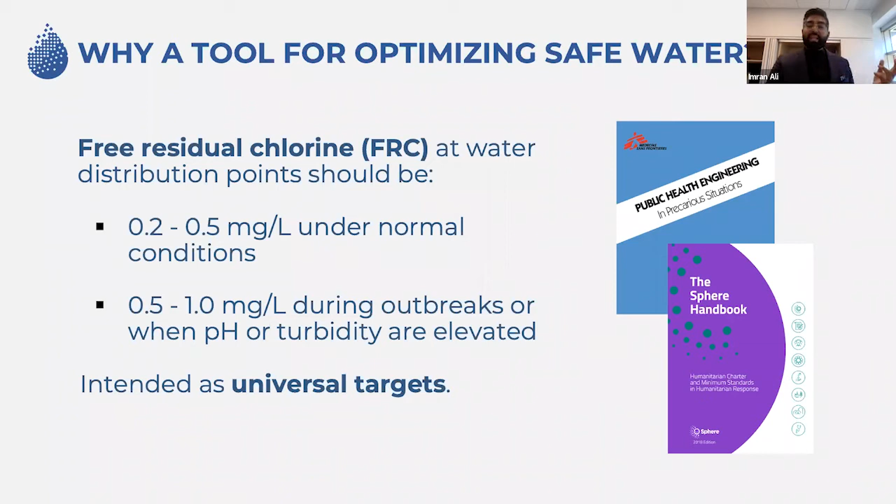Now, what's important is that these are intended as universal targets that are applicable in any emergency setting around the world. Now, typically in a camp setting, we rely on centralized water treatment using chlorination, right? And our usual practice is to monitor FRC levels after about 30 minutes or 60 minutes of contact time, and then to follow up with monitoring at the tap stand. This is the critical point where we're meant to deliver those universal FRC targets at the tap stands.

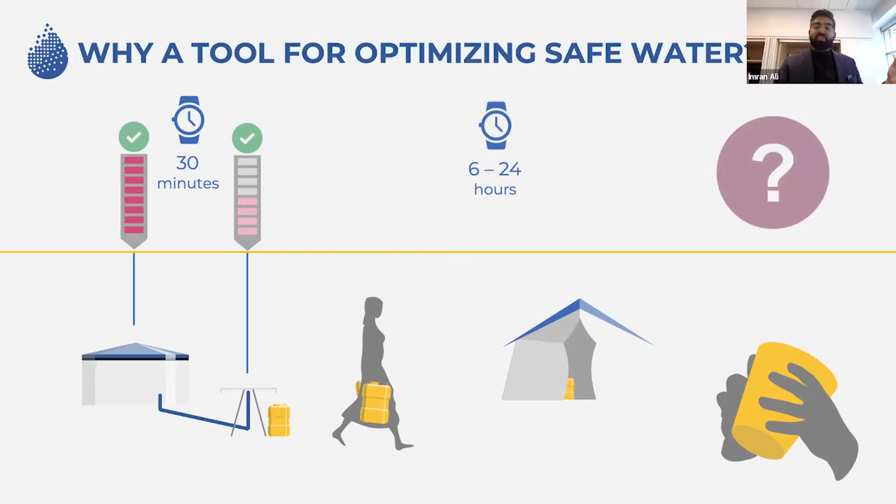But what happens after that water is collected, transported home, and then stored and used over many hours? Even if that water is originally safe at the collection point, we often don't know whether that residual protection is sufficient to persist through that last mile of the safe water chain before drinking. That could be 6 to 24 hours later, depending on the situation in the particular setting we're working in.

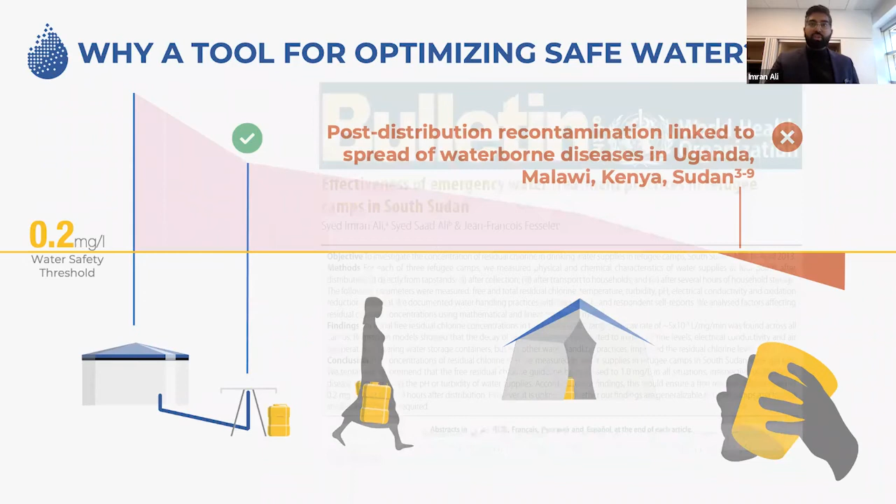Now, we encountered this problem firsthand during a major hepatitis E outbreak in refugee camps in South Sudan. There, we observed that even if water meets the humanitarian FRC standards at the distribution point, that FRC protection only persists for a short period of time, and then pretty quickly thereafter falls below that protective threshold, leaving the water vulnerable to being recontaminated by waterborne pathogens. And there are, in fact, many reports about water being recontaminated after distribution, leading to the spread of waterborne illnesses amongst displaced populations. We described this problem in a paper in the Bulletin of the World Health Organization, based on experience in South Sudan.

Now, what we saw in South Sudan and in other sites that we worked was that chlorine decay after distribution is really significant and is really rapid. So what we need to be able to do is model that chlorine decay so we know how much to add at the beginning to ensure the right amount persists through that last mile and arrives at the point of consumption. Now, unlike the initial chlorine demand of raw water or the decay that occurs during distribution in tanks and pipes before the tap, what happens after the tap, that post-distribution period, is really challenging to model.

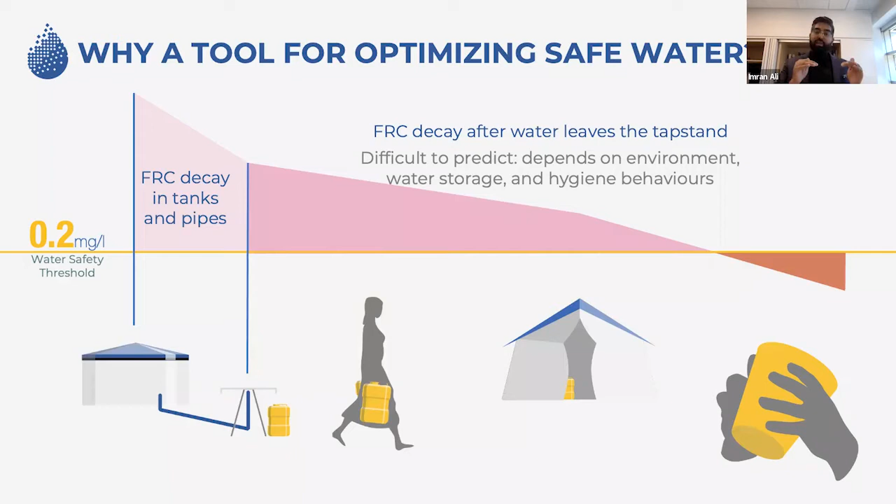It depends on factors that are related to the environment, to the raw water quality, users' behaviors, that are very site specific, they're very variable, and they're not really well understood in terms of what kind of impact it has on the water quality. And the modeling is important because it's not just a matter of adding more chlorine. A chlorine dose that is too small results in the risk of recontamination, but too much chlorine can lead to acceptance issues around taste and odor rejection. So we have to get the modeling right so we know how much we need to deliver to protect public health, but not have so much as to drive rejection.

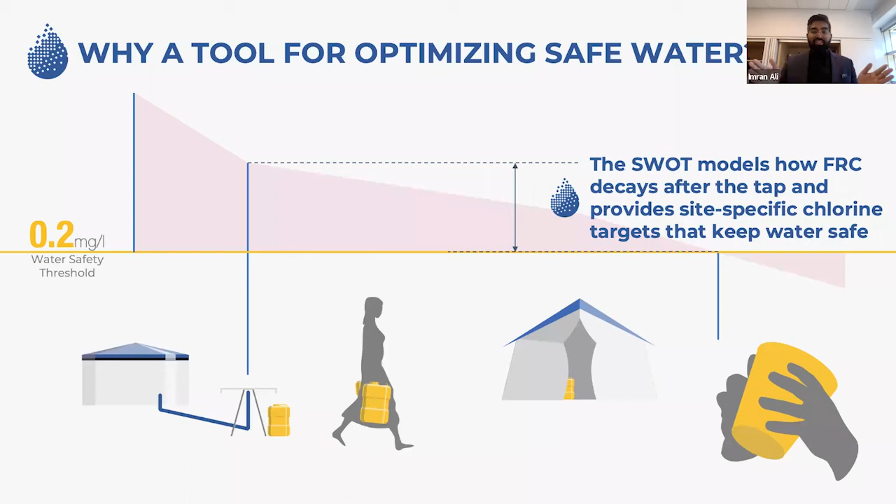That's where the SWOT comes in. The SWOT uses the water quality monitoring data that we already collect in the sector to model how FRC decays after distribution, and then uses these models to provide site-specific and evidence-based water chlorination targets that keep water safe all through that last mile of the safe water chain to where it's actually consumed. So for example, the SWOT may suggest in a particular water system that the target FRC at tap stands needs to be at least 0.9 milligrams per liter in order to maintain that protection for up to 15 hours.

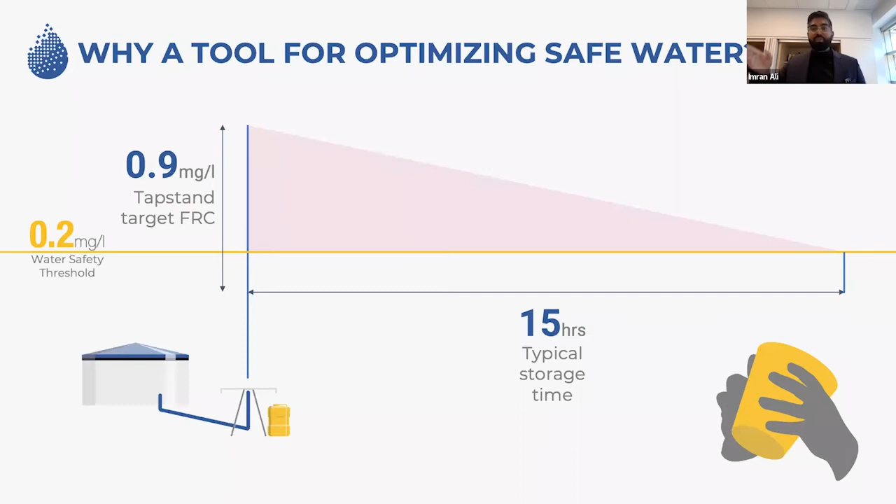Since there's so many different things that can happen to water after it leaves a tap stand, there's a wide range of chlorine decay rates in actuality. The modeling tools that the SWOT deploys are probabilistic and provide a forecast of household water safety, given the natural range of conditions that are encountered in the real-world field setting. The SWOT provides a summary of the current household water safety at the site with current practices and the predicted improvement in household water safety if the SWOT target recommendation is implemented at tap stands. Now, this information is critical for deciding what action is needed to improve water safety at the sites that humanitarian responders manage.

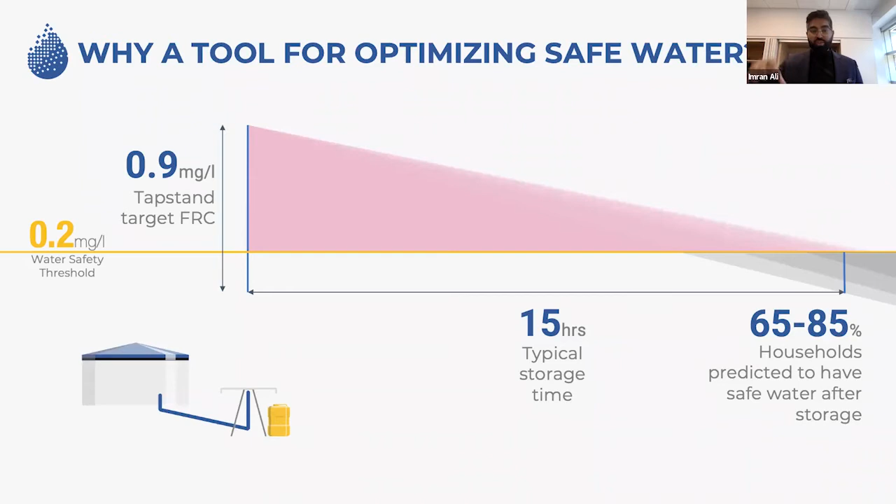This could mean increasing FRC at the tap stand, but it could also mean slowing down chlorine decay in the setting by, for instance, rolling out a jerry can cleaning campaign or through better water storage. Based on those site-specific conditions, we can help you identify what are the most appropriate strategies for improving water safety. And as the situation changes, the SWOT modeling takes this into account and adapts, reflecting the current situation and generating a time-specific and suitable recommendation for the current prevailing conditions.

Let me give you a quick overview of how it works. So the SWOT takes the water quality monitoring data from tap stands and households that are already being collected in many sites around the world. Field workers can take that data and upload their monitoring data to the cloud, to the SWOT, where it's processed using our numerical modeling and machine learning engines.

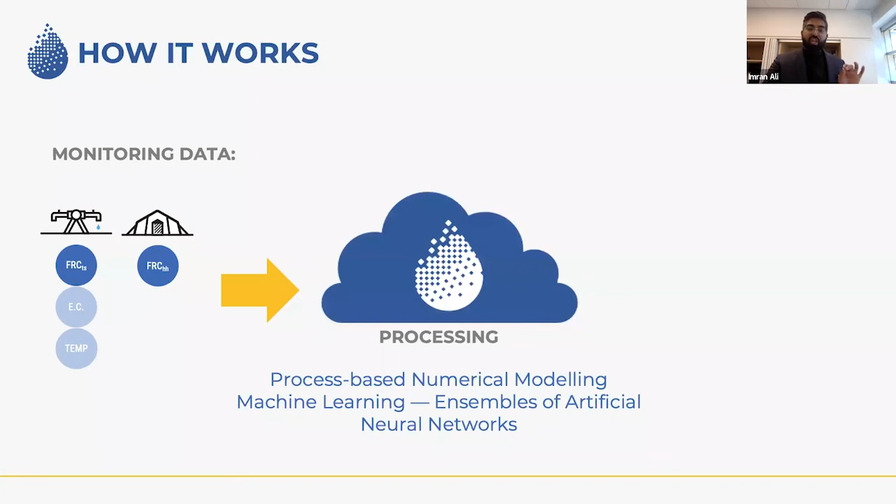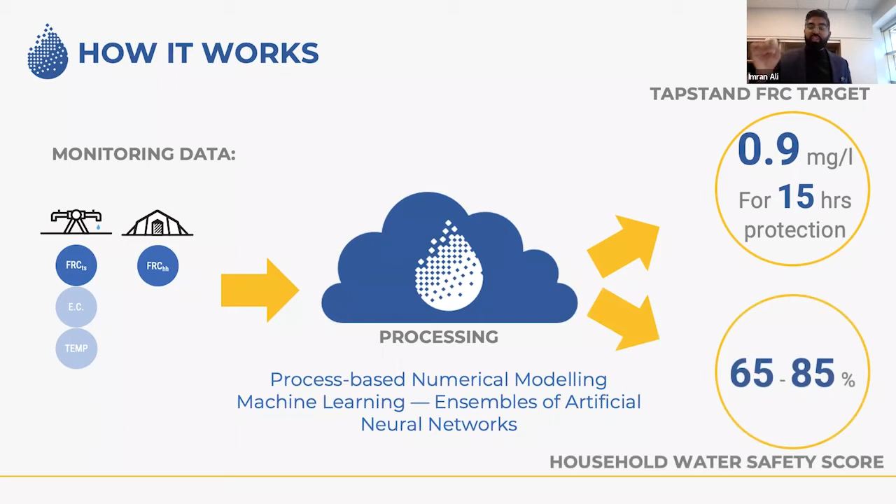These generate a site-specific and evidence-based FRC target that ensures water safety for a user-specified duration of household storage time. So in some settings, that might be 15 hours, in other settings, that might be 24 hours, in other settings, it might be 12. Depending on the local conditions, we can specify a chlorination target to protect it for that duration. It also specifies what is the household water safety that we can expect if we implement the target compared to the status quo practice.

Now, how does it work? There are two modeling engines under the hood. The first is based on chemical engineering first principles using process-based numerical modeling techniques. These are an adaptation of the chlorine decay modeling systems that are used in the closed system of distribution pipe networks and adapts it to the open system of the post-distribution setting. The second approach we take in the SWOT is based on machine learning using ensembles of ANNs.

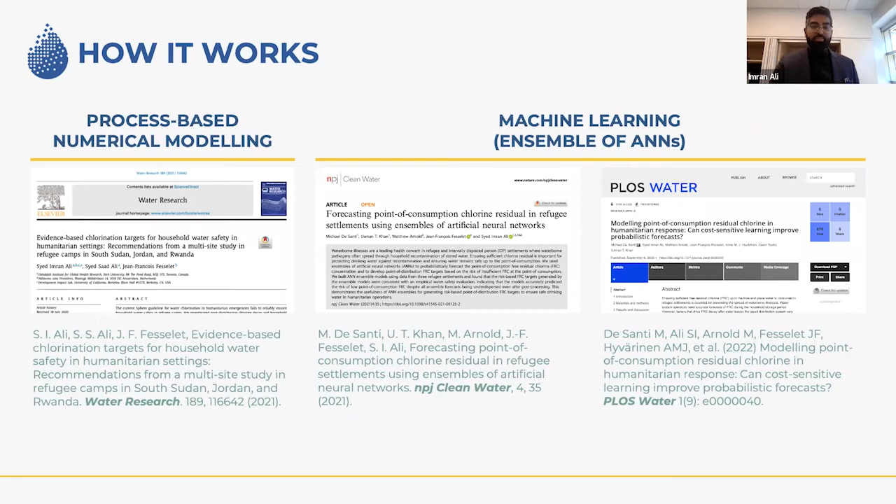And both of these have unique advantages that provide us with the robust recommendation that we combine in the SWOT's analytics. And you'll hear more from our modeling team later on about where we've come in these modeling engines and what's next for us. Our team has led the first engineering research on the phenomenon of post-distribution chlorine decay and published a number of papers in leading peer-reviewed journals describing our modeling methods, and they're completely open source and available for anyone to implement in their settings.

Now, from a field user perspective, here's how data collection works. The SWOT works on the principle of paired water quality sampling. Each paired sample consists of a time measurement of FRC at the tap stand with a follow-up at the household from the same water 6 to 24 hours later. So what you do is first you test the water quality at your tap stand as you normally would. Mainly, we're concerned with FRC, but we can also use electrical conductivity and water temperature data to help improve the accuracy of the modeling results.

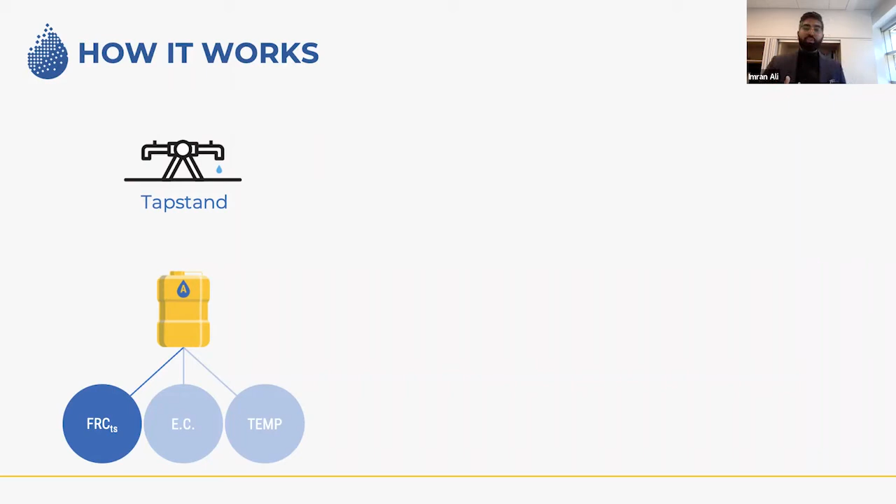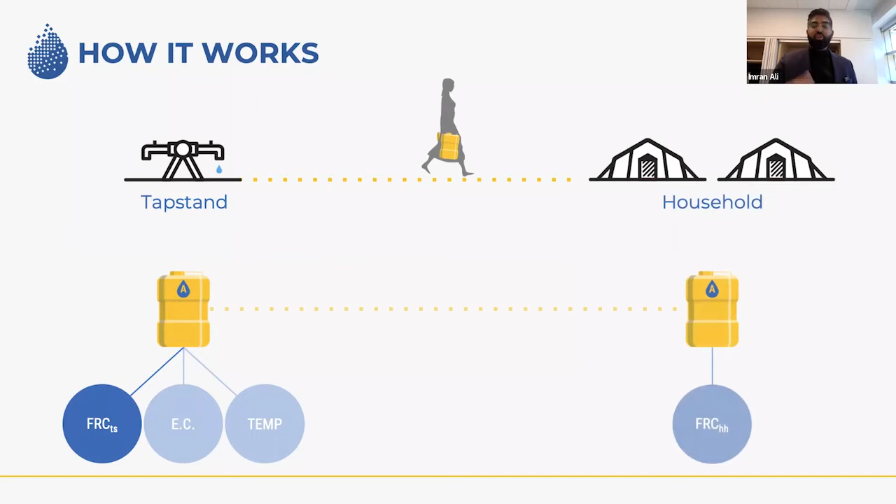We then accompany the water collector back to their home and mark the container. And then we return to test the water quality again after the normal duration of household storage and use. So we only have to look at the FRC at the household, and that time can be 6 to 24 hours later. Now, the SWOT requires about 150 of these paired samples in order to provide an accurate recommendation.

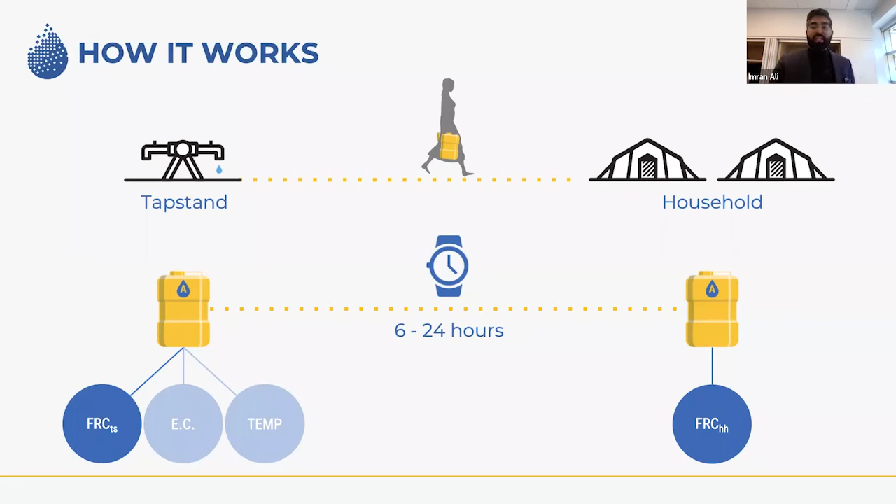And users typically collect those 150 paired samples either as part of their routine monitoring, because they're already testing at the tap stand, already testing at the household. So we just combine the two together, or as part of a specific assessment, like a big KAP survey where we're doing a lot of household monitoring. So either one of those two modalities can work and integrate with the SWOT. This is the same data that is used for monitoring and quality assurance and reporting. So we use the data that's already being collected widely in the sector for building these site-specific and evidence-based chlorination targets.

Now, let me walk you through quickly some of the work we've done on building and testing the tool. The SWOT is built on years of water safety research in refugee camps, including foundational research we carried out in South Sudan, Jordan, and Rwanda. We've carried out field implementations and deployments of the version 1 prototype in Bangladesh, Uganda, Somaliland, Syria, Nigeria, and Tanzania. And we've been working with seven implementing partners across these contexts.

In 2019, we carried out a major proof of concept study of the prototype SWOT to see if the chlorination target generated by the SWOT could improve household water safety outcomes compared to the status quo humanitarian FRC standards. We carried out this proof of concept study at the Kutupalong-Balukhali camp in Cox's Bazar, Bangladesh, in collaboration with MSF and BRAC.

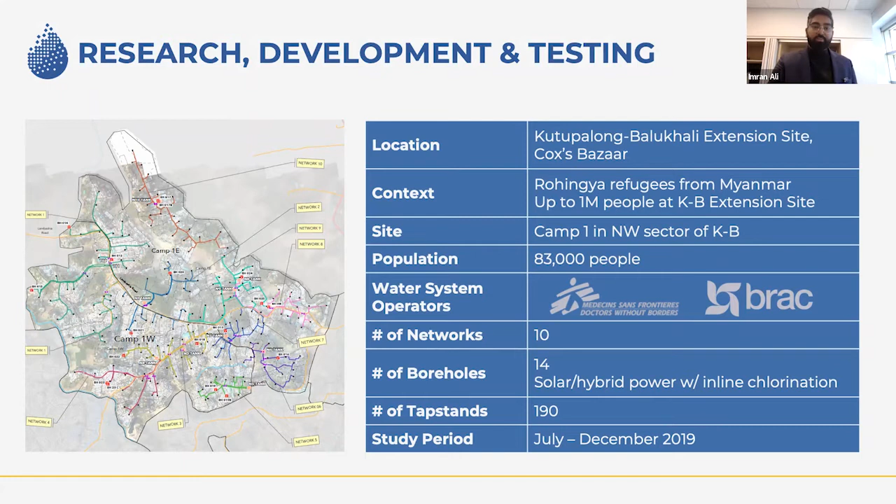Now, what we saw at the Kutupalong-Balukhali site was that with the status quo practice, meaning using the Sphere chlorination targets, at 12 to 18 hours later, which is the typical duration that people were storing and using water at this site, about 42% of them had sufficient residual to protect that water at the point of consumption. However, when the SWOT target was implemented at tap stands, it doubled the proportion of households that had safe water at 12 to 18 hours. So a massive improvement in the effective household water safety by implementing the SWOT.

Now, through the proof of concept study, plus the remote pilots we undertook in Nigeria and Tanzania, and all the other field deployments, we've been listening to the users of the SWOT on the feedback they have for us and learning from our experience in the field. What we've learned is how we need to adapt the SWOT to make it more effective and suit our users better to help them deliver safe water in emergency settings. We got a couple of key points of feedback that we wanted to build on.

One of them was improving our UX, UI, our user experience and user interface, to make it more user-friendly and intuitive. We also got feedback that users wanted a results and data visualization dashboard on a web platform, which we didn't have in version 1. Users also wanted continuous site records and functionality to manage a portfolio of multiple water supply project sites, basically creating an online workspace for water quality. We needed more robust modeling, as well as integration with mobile data collection tools like Kobo.

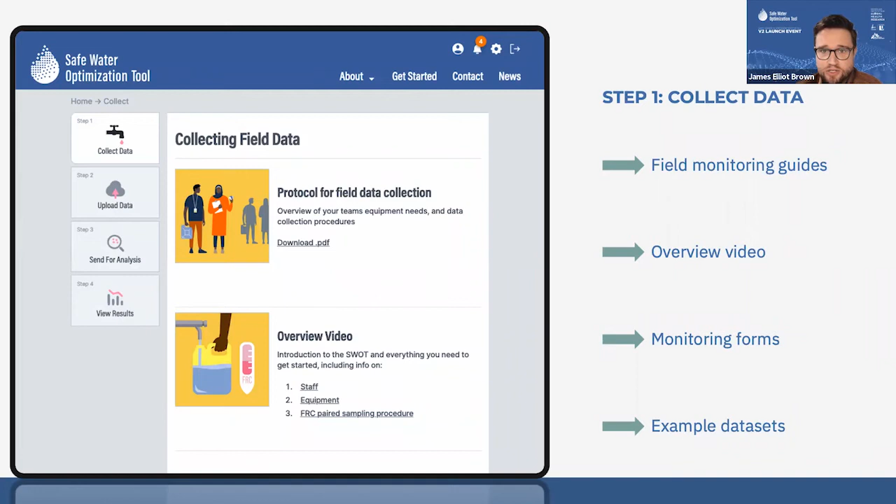So we'll start off with the first step. This is data collection. So in this page of the website, we've got some field monitoring guides. We've got links to an overview video, some sample monitoring forms, and example data sets you can use to get used to the kind of data collection and data management tasks that are going to be needed for using the tool. At the same time, obviously, we have a lot more information behind the scenes, and we would be very happy to help you access it and help you set up monitoring systems for your particular context.

Next slide. In terms of uploading data, as Imran suggested, we've based this iteration, this version 2, around being able to add additional data and build up a big data set for a particular field site. So you'll see here at the top, the first task, when you're uploading your data, is to assign that data to a particular field site. And that field site will exist within a country and an area that we will set up for you as part of the onboarding process.

The next step is to drag and drop your file into the interface. And so the SWOT accepts either a comma separated values or an XLS Excel sheet. And we can provide templates to help you get set up and help you understand the formatting of those files. It's relatively straightforward. Drag and drop that onto the interface, and then you click upload, and that sends that data into the interface, and we clean that data in the back end, and we create a data set that can then be analyzed. So that's the next step.

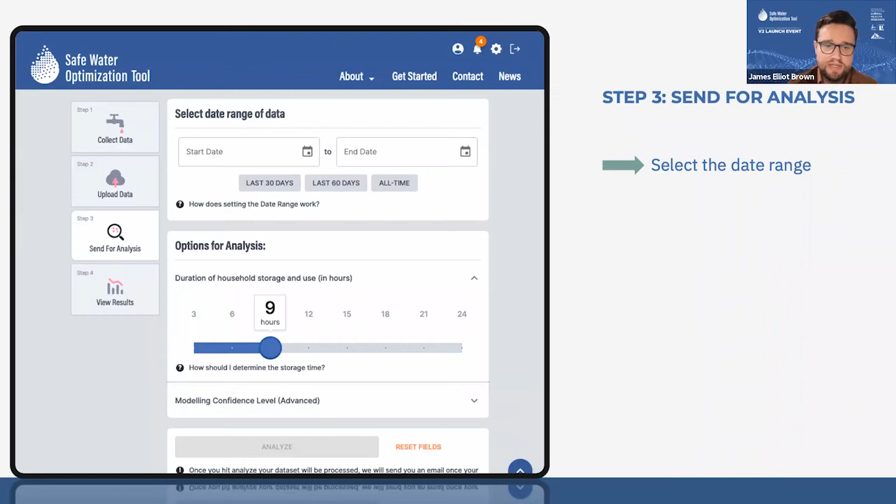So this is a send for analysis interface. The first thing you have to do after you've selected the field site that you're going to be analyzing is to select the date range. So now in this version 2, where you potentially have several months or even years worth of data collection all being stored at the same site, this date range allows you to pick a particular period of time, and the SWOT is going to select samples from the data set that meet that time period. So you could potentially use that to analyze what would happen in the summer versus the winter, the dry season versus the wet season. Or of course, you can analyze the entire data set and get the richness of the data throughout the year.

The second step is then to set the storage duration. So this is the amount of time that people in your field site are typically storing water. So whether they're collecting water in the morning and storing that throughout the day, or if they're collecting it in the morning and again in the evening, and that storage time period is much shorter. This is what the analysis uses basically to create the FRC target.

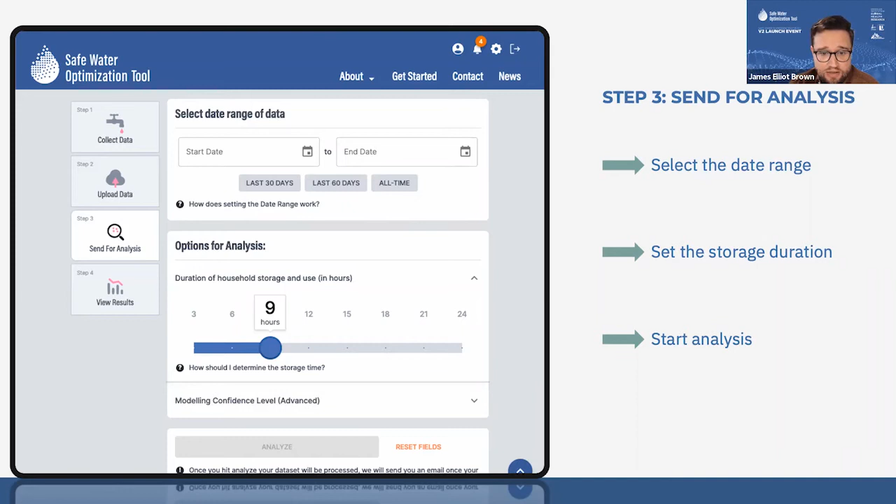And then once you've set the options for analysis, you can start the analysis, and then you'll get a notification that the modeling has started. The analysis will progress, and when that's ready, which depending on the size of the data set and the number of samples could take several minutes or up to an hour, you'll get an email that tells you that the analysis has been completed, and you can move to the next step, which is viewing the results.

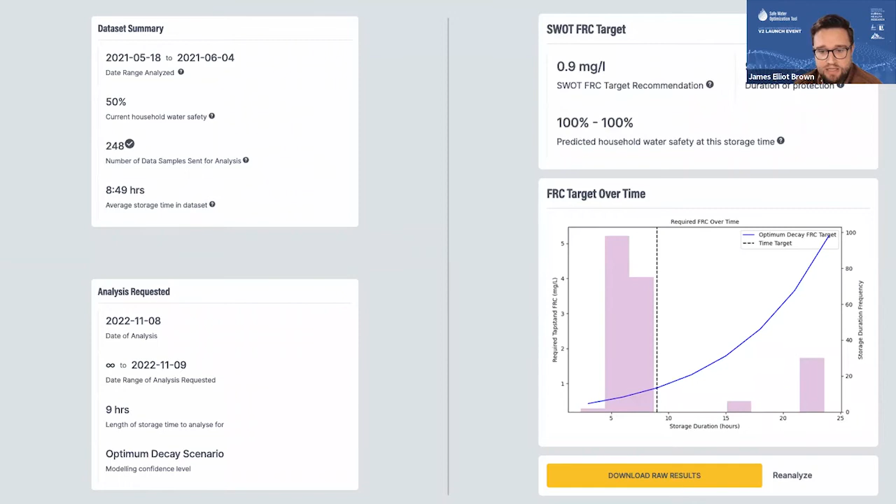And then one other thing that you'll see is this graph showing how the required FRC, how that FRC target at the tap stand is going to change depending on the amount of storage time that the analysis is run for. So you can see the dotted line is the 9 hours that we've run the analysis for. And you can see that if we were to increase the storage time to 24 hours, that would produce a very high tap stand FRC. And then you can also obviously download the raw results if you want a more detailed understanding of what's going on in that data set.

So that's the general workflow. I think it's relatively simple. It's relatively straightforward to progress through those steps. And obviously we're happy to dig into any more details during the question and answer.

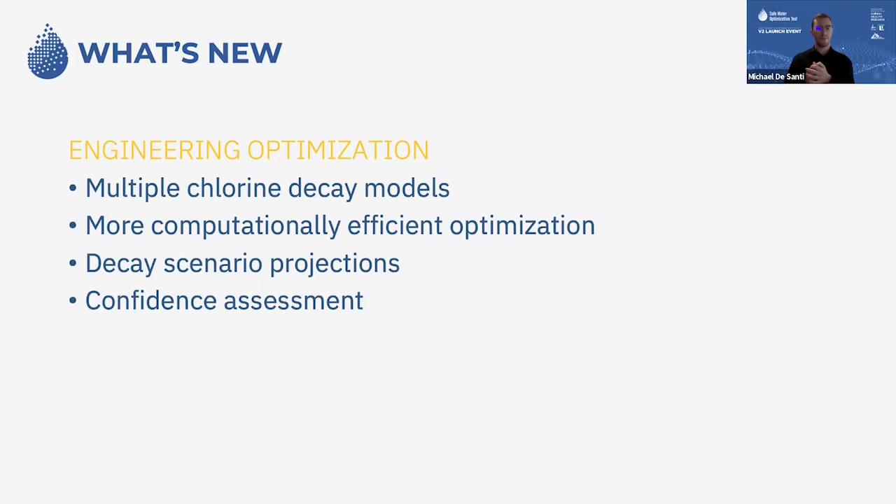So let's look at that first one, the multiple chlorine decay models. As I mentioned, chlorine decay has been studied for decades, but there's still not a lot of consensus, even within pipe distribution systems. So for this post-distribution period, there's even less understanding of how it works. So we're now expanding from having a single chlorine decay model to having 3 different chlorine decay models. A very simple first-order model, the parallel first-order model, which is very commonly used in water treatment practice, and then the power decay model, which is a really super powerful model. It was what we built the first version of the SWOT around, and it's very powerful, but it has a few issues, which I'm going to show on the next slide.

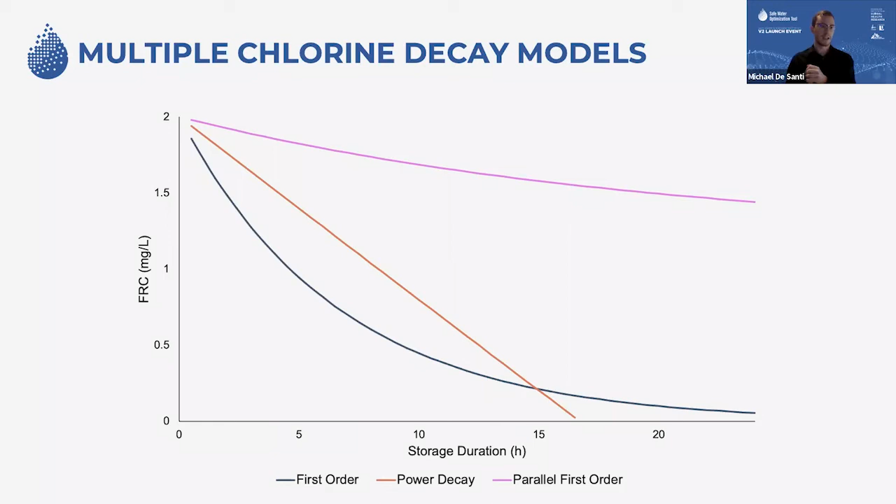The other issue is that sometimes the parallel first order, that pink line, can essentially become just a linear model when it converges to weird sets of parameters. So by having 3 different models, especially the first order decay model, which is very reliable, we can leverage the power of stronger models like the parallel first order and power decay model while still being able to fall back on the first order model if the optimization comes to a solution that doesn't really make sense for a given site.

So let's move on to the next aspect, which is computationally efficient optimization. I'll cover this really quickly, but we essentially found a better way to train and identify the decay parameters using a multi-start ensemble approach instead of a grid search approach, which just means that we are running fewer calculations and focusing them on areas of high performing parameters instead of exploring a huge search space in a very time consuming, slow approach. And this just means that we can get targets out to users faster. We're going from 15 minutes to under a minute to run the different models now.

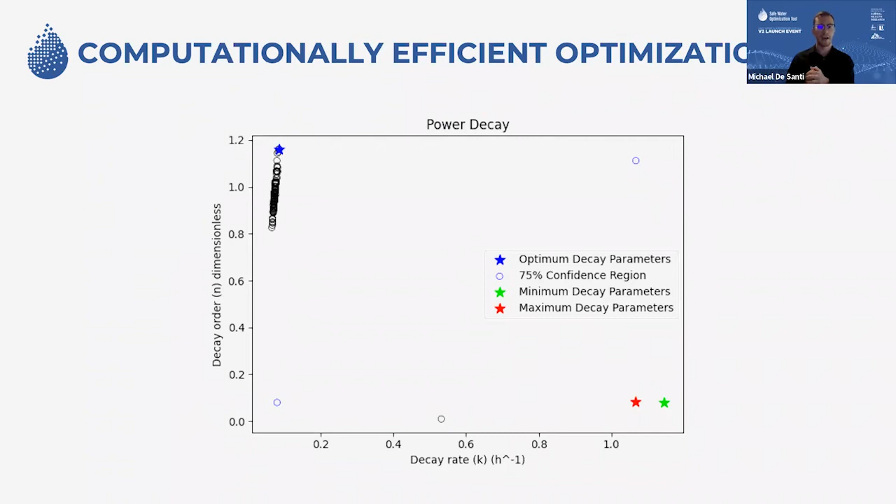And if we jump to the next one, James already showed this graph, so I'm not going to put too much time into it, but previously with version 1, if you didn't like your target, you would have to go in and re-optimize for a shorter decay period. Like if you had a target that was just too high, you couldn't make it work on site, you'd have to go in and re-optimize. But for a single decay scenario, we're now providing the data for you to actually pick out that new target after one optimization.

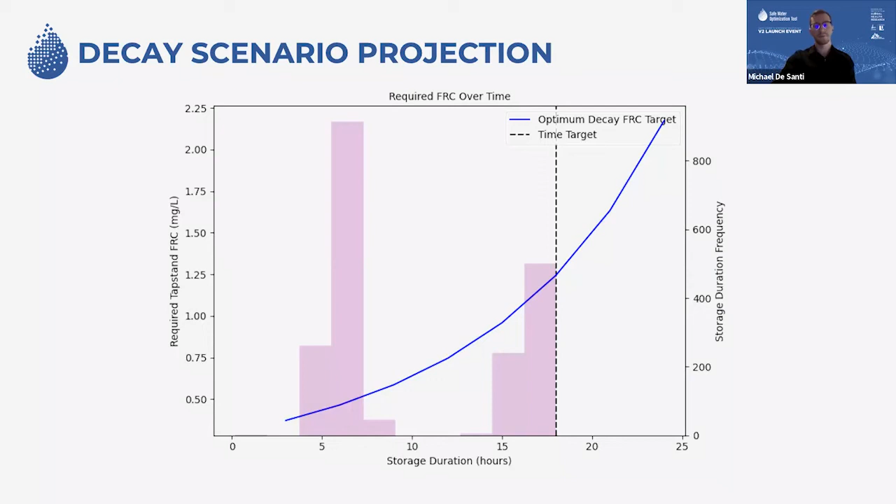So this saves you time on reanalyzing the data and needing to rerun the SWOT for different time periods. And the final improvement was a confidence assessment, which essentially looks at different aspects of the data set, the model performance, and the alignment between the data collection and the targets requested to identify what was good in the model and where there might be gaps that might be leading to targets that are not necessarily going to be reflective of what's really needed, just due to mismatch between data collection and storage durations, or just if the model's not performing particularly well. So this gives you more information about what's coming out of the model, and allows you to know how confident you can be with the targets.

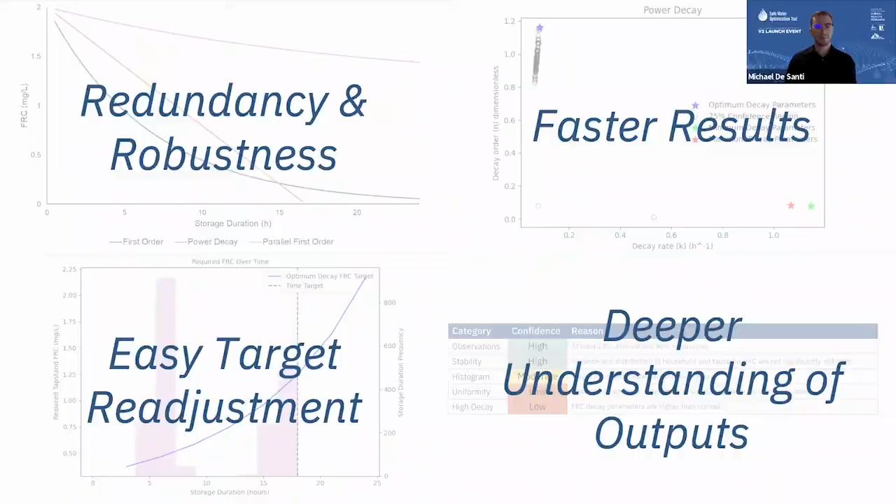So yeah, just to briefly summarize the changes with the EO, we've added additional decay models to increase redundancy and provide more robust optimization. We're using a more computationally efficient approach to get faster results. We're providing you with the data to make easy target readjustments on your own. And we're also providing some deeper insight into the analytics through confidence assessment. So now with the neural networks, we have 3 main changes.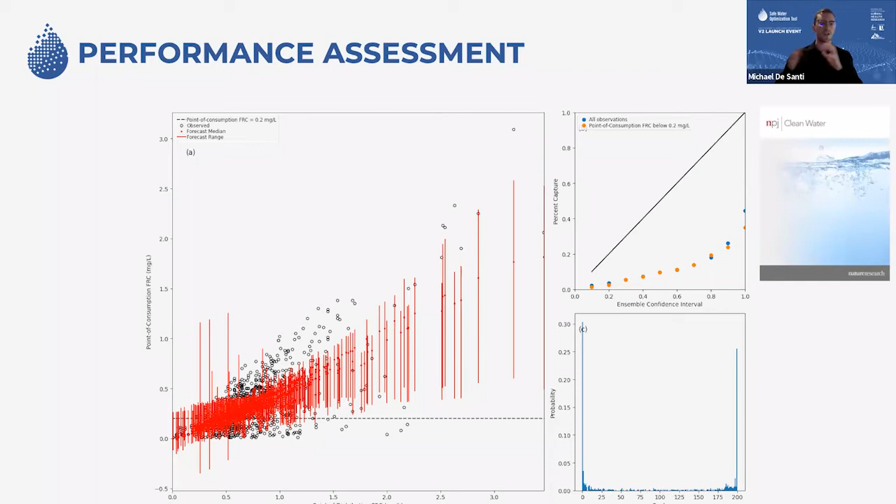But it also is part of a really key shift in our mindset on the ANNs to really embracing probabilistic modeling as the way that we're moving forward on the artificial neural networks. So the next, and this is really explained well in our NPJ Clean Water publication, and that was really the motivation and where we explain how that differs from what we were previously doing with a more deterministic-ish approach. So the next change is very much about

the data going into the SWOT. So in the version 1 prototype, we had a lot of initial analyses that showed that time was not a strong predictor of chlorine decay using the artificial neural network approach. And because of that, we didn't include it as a predictor in the version 1. However, that also meant that we couldn't set targets for a specific time. So as we developed version 2, we began a new assessment of how can we incorporate time into the SWOT so that we're not just putting this variable in so we can set a target at a specific storage duration, but actually get value out of the storage duration.

And we found that if we use the timestamps and got the collection time, whether it was morning or afternoon, just that nice little binary divide, we got a lot more value out of having the storage duration in the model. So we are now allowing you to use the ANNs with a specific storage time in mind, and also building a new variable that we can build straight out of the data you're collecting. You don't need to do anything else to get even more value out of that storage time.

The other main change to the input variable selection is that Imran mentioned that we have optional EC, electrical conductivity, and water temperature data collection, but that's not always feasible on site. And the version 1 prototype of the SWOT was not good at dealing with missing measurements of either electrical conductivity or water temperature. And that was leading to some skewing of the targets.

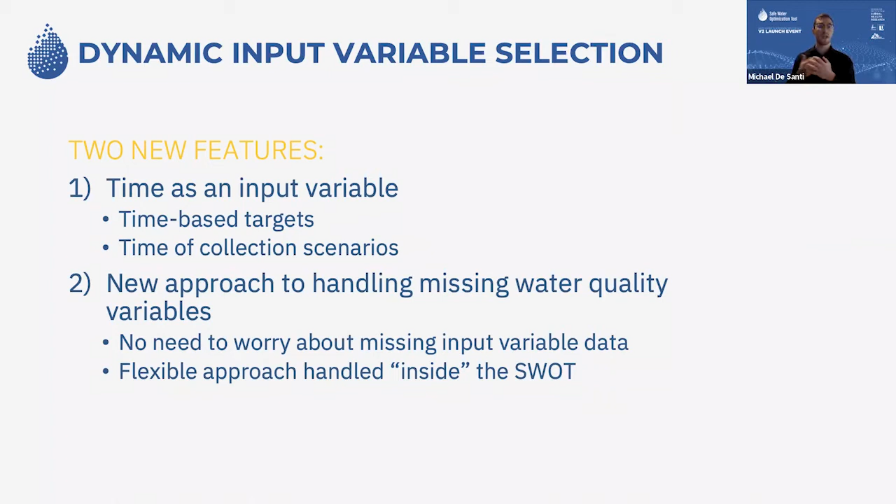And then our final change is related to scenario analysis. So previously in the version 1 SWOT, we built a risk profile based off of kind of the average site conditions. However, unsafe water doesn't always happen on the average days. It's often in these worst case scenarios. So when the water is the warmest, causing accelerated decay, when there's the highest number of dissolved compounds that can react with the FRC, that can often contribute to additional water safety risk.

So we now actually use 4 different scenarios, an average case and a worst case. This relates to the water quality. So average case would use average conductivity and water temperature. Worst case uses upper 95th percentile for water temperature and conductivity. And then also looking at the time of collection, because we found that that does really drive the rate of safety, so that you can now, for different tapstand FRC concentrations, look at the range of potential risks that can happen under these different scenarios.

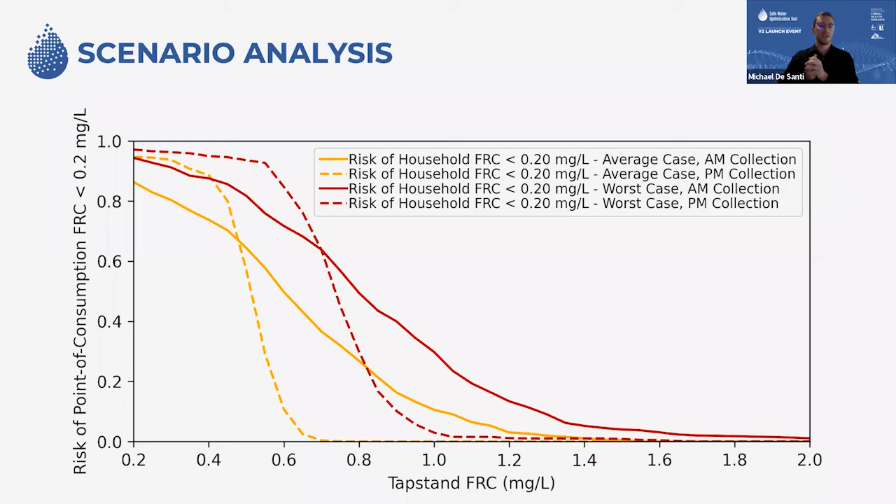So that's giving field users a much better understanding, instead of saying one scenario is going to happen all the time, of understanding what will happen in different conditions. So now, just to finally give a quick recap, we're implementing clear and

probability-based model diagnostics. We're making our modeling much more adaptable to the data already being collected, and we're generating different targets for different scenarios to give field users a better ability to tailor the target to their conditions and to what they are most worried about.

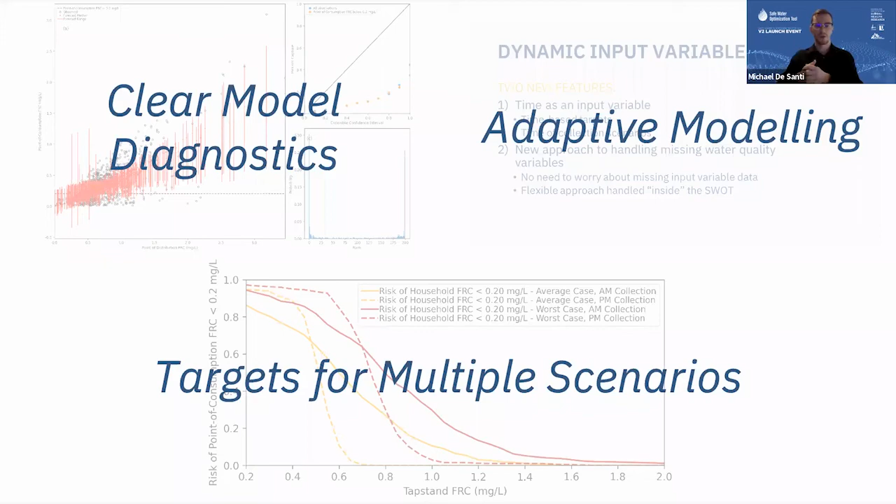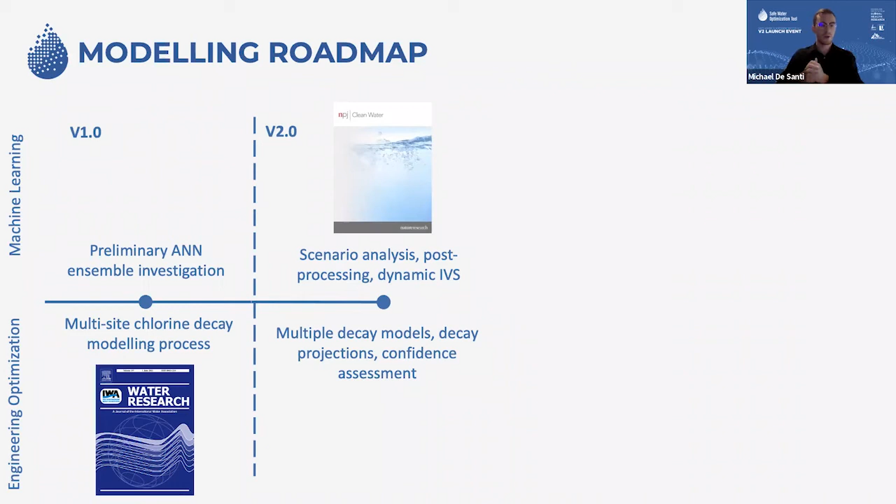So finally, I'd like to wrap up with just a roadmap for where we're going. So I've discussed a lot of the version 1 and the version 2 analytics. Imran, if you can just click through. So coming forward for the new versions, we've already begun working on advanced ANN training.

We found that the biggest room for improvement in improving the ANN analytics is to improve the way that we train them, which is a really novel and exciting, groundbreaking approach that we're taking in the machine learning analytics, and also now building in that probabilistic mindset into the engineering optimization tool. We've published some early results from the ANNs in PLOS Water and presented some of the preliminary probabilistic ensembles at the Canadian Society for Civil Engineering conference this year.

And all that's to say is that this is already underway. We are already starting down this road towards these updates. And then finally, what we're really excited about in version 2.2 is, instead of treating these as 2 separate branches of modeling and analytics, actually integrating them using hybrid modeling, so that instead of 2 branches running in parallel, it's one unified modeling approach.

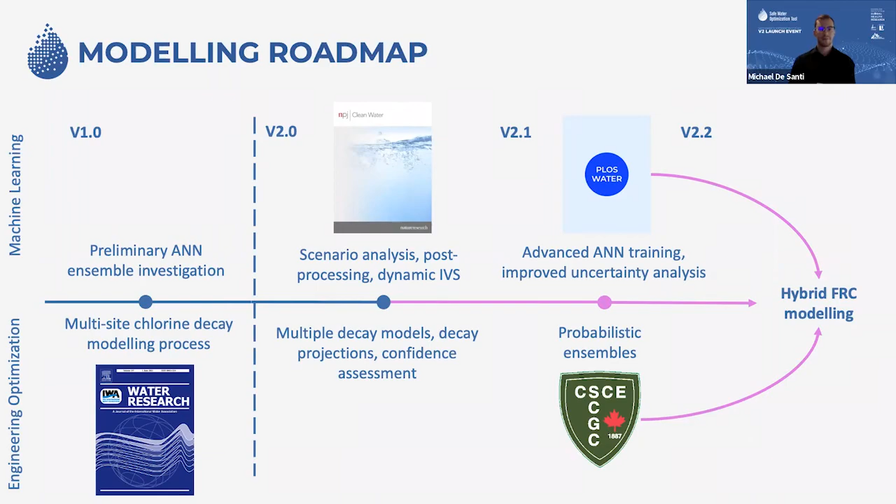Great. Thank you so much, Mike and Usman, for walking us through just the phenomenal amount of research you've been leading on applying really cutting-edge data-driven modeling techniques to this humanitarian health problem. So thank you so much for walking us through and showing how it links up with the SWOT product. And we'll come back to, if there's any questions around the analytics, we'll come back to that in the final Q&A discussion.

The next session, part of this session, will be a field user perspective. So here I'd like to invite Jeff Vesely, the WatSan Unit Coordinator from MSF OCA, to offer some remarks about how the SWOT fits in with the MSF's work in the field, and what are some new emerging questions from MSF's experience that need addressing, that potentially the SWOT can feed into too. So Jeff, I hand it over to you.

Thank you so much, Imran, and very warm greetings from the Netherlands. It's dark here, so I'm sorry for the lighting. I try to adjust my workspace a little bit. I'm working from home, so that's how you get it. I'm not as professional as all of the other presenters.

I want to thank everyone for attending, but I really want to thank the team in York and the Dahdaleh Institute, and especially James Orbinski, without whom this would never have been developed and gone as far as it is today. I'd like to particularly thank Imran, with whom I've been enjoying working, discussing, thinking, looking at the future, and that's been for almost a decade now. And I'd like to thank the team also, Matt, James, Michael, Usman, who've also been really helpful in this process.

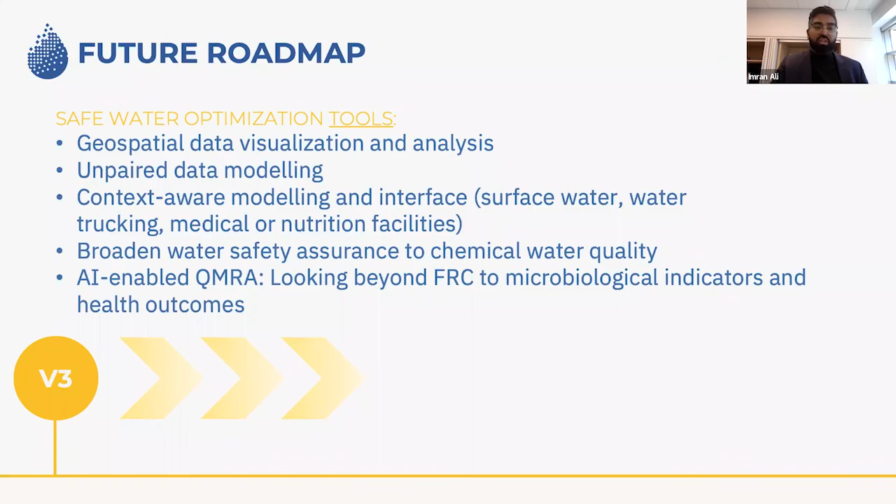Now, this work that we're doing is all an initiative of what we're calling the Humanitarian Water Lab here at the Dahdaleh Institute for Global Health Research. And, as you've heard today, we are a group of practitioners and researchers. We understand the field, we have worked in the field, and we're trying to now mobilize research to address the questions that are coming out of the field. So the SWOT is one example, but there are many other research initiatives we're leading here at the Humanitarian Water Lab, addressing those pressing questions from the field.

Now, before I conclude, I just want to offer really warm thanks to our core funders, the Achmea Foundation, Humanitarian Innovation Fund at Elrha, and Grand Challenges Canada, the Humanitarian Grand Challenge, as well as our research collaborators at Tufts University, across York, in the different departments, including at the Lassonde School of Engineering, and of course, our field users who have been bravely implementing the technology and trying it out and helping us understand how we can improve it. So thank you very much to the whole network of people who have been involved in getting the SWOT to this place.

Finally, for those who are interested in getting to use the tool, and we'll be reaching out, we're here to provide technical support, training workshops, and site-specific advice. We're committed to getting safe water to the people who need it. SWOT is one component of that, but we're here to offer advice on the full range of activities to achieve that public health goal. So please reach out to us, check out our website, but also on Twitter, and we're here to support you. And I'm going to stop right there and hand it over to James for the final remarks.

Sorry, James, for taking too much time there. Go ahead, James. Oh, no problem. No problem. That was great, Imran.

I think what is really self-evident here is that this package of application around the Safe Water optimization tool is a perfect almost marriage of the academic research environment and the practical operational field demand that exists around humanitarian issues. It's very exciting for me to see and to support the evolution of the Safe Water optimization tool through its various versions. And it's very gratifying, frankly, as director of a research institute at York, to see real progress and to see how the team responds to real issues, but also to some pressure. I'm pretty good at putting pressure on people.